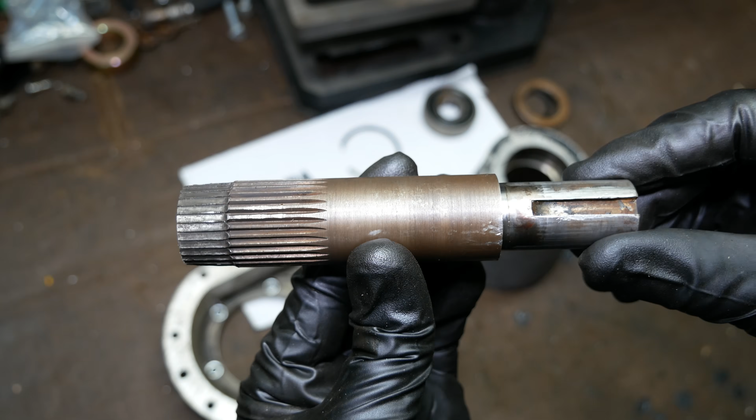There's a lot to say about the adventure that I ended up having trying to replace this input shaft, and we'll try to condense it into this video as much as possible. First, we'll take another look at what's wrong with it. You don't need a particularly keen eye to do so though, as the last half-inch of splines have been clearly sheared off. The exact cause of this is unknown to me, and this appears to be the weak link in a chain, whether it was designed that way or not.

The input shaft engages on this coupler, which is bolted to the drive gear in the front end of the supercharger. It's pretty clear that these splines don't have a ton of surface area to work with based on how shallow the engagement of the input shaft was. The damage to the coupler isn't as obvious, but is definitely still enough that it should be replaced.

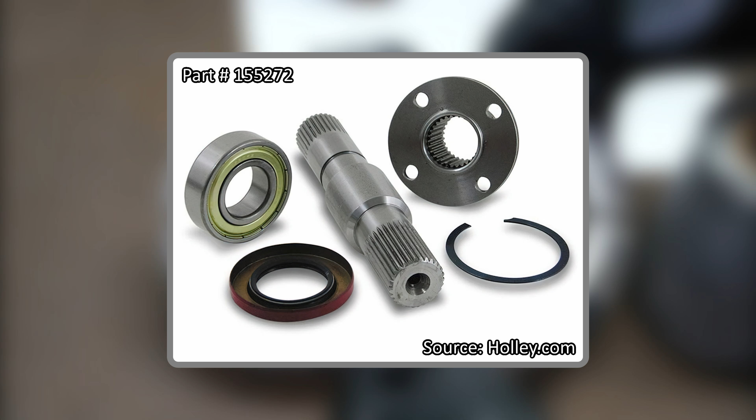The problem here is that not only has B&M as a standalone company not existed since 1999, it would seem that when Holley bought them, they didn't continue the 250 line of superchargers for all that long. And while there is an input shaft set available on Holley's website, it's a different model that uses splines on both ends. I scoured the internet and made a few phone calls, but it seems like there's just no way to get one of these shafts anymore.

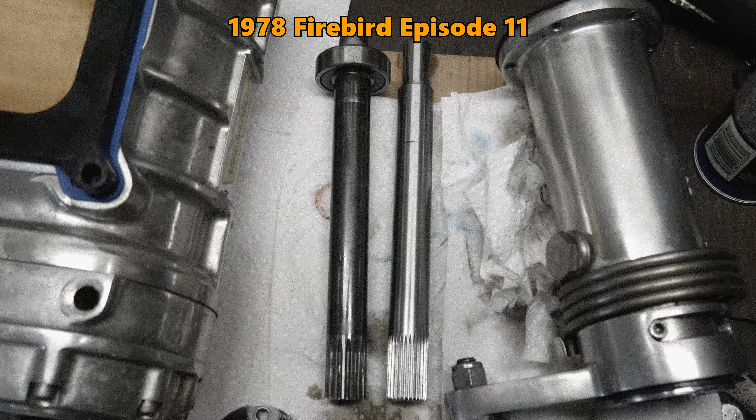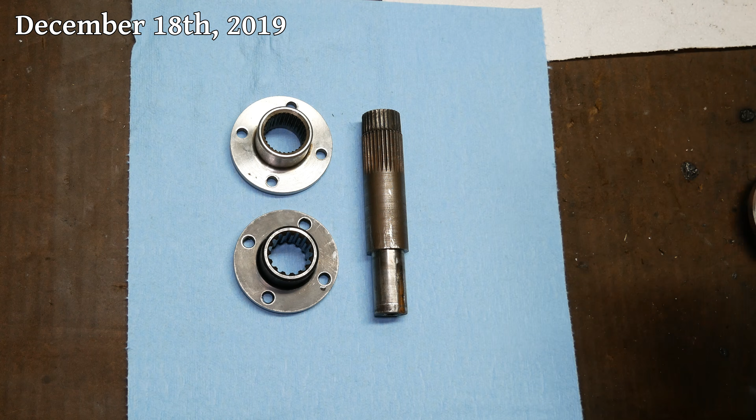But from our past experiences with the Weiand 144 supercharger, which is very much based on the old B&M designs, we know that its front drive parts bear a striking resemblance to those in the B&M 250. The problem is that the input shaft is just a little bit longer. This particular example is also a coarse spline layout with only 15 instead of 30 like on the fine spline models. We removed these from the 144 because the looseness in the splines was creating a bit of excess noise.

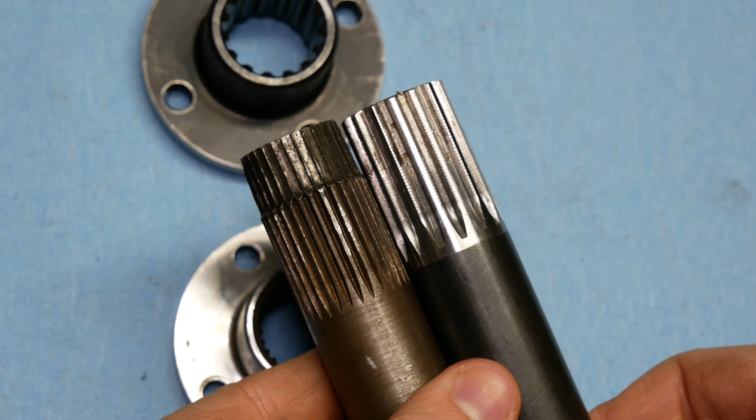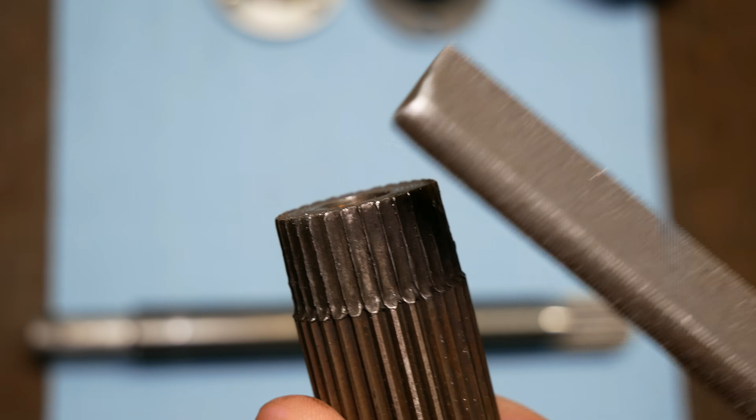It ended up being very convenient that we had these sitting around because we were able to use them to confirm that the old B&M parts are compatible with the newer Weiand parts. And other than the spline count and, of course, the obvious difference in length, they seemed like a perfect match. Taking a file to the old input shaft, it sure seems like it's made out of mild steel, and at the very least, none of it is hardened anymore.

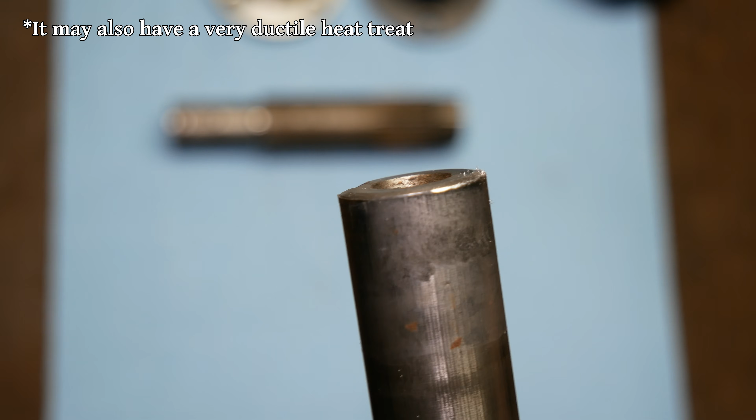The 144 input shaft is definitely harder, but the file still marks it, and I think it's probably just a different grade of steel. At this point, it's clear that we're going to need a custom input shaft to replace the old one, but I don't really want to use the coarse spline shaft because it might just have the same rattling issue it did in the 144.

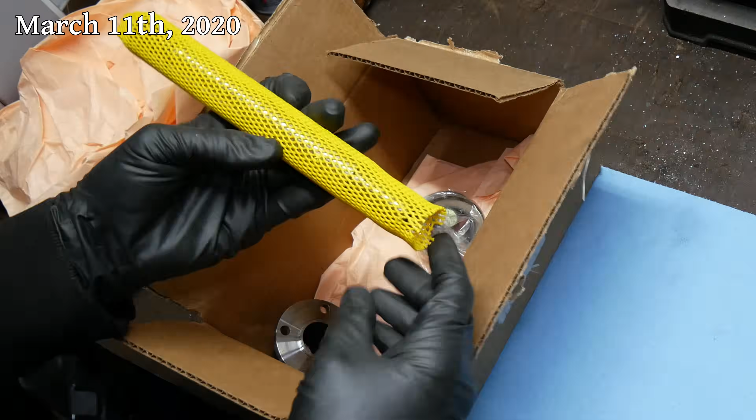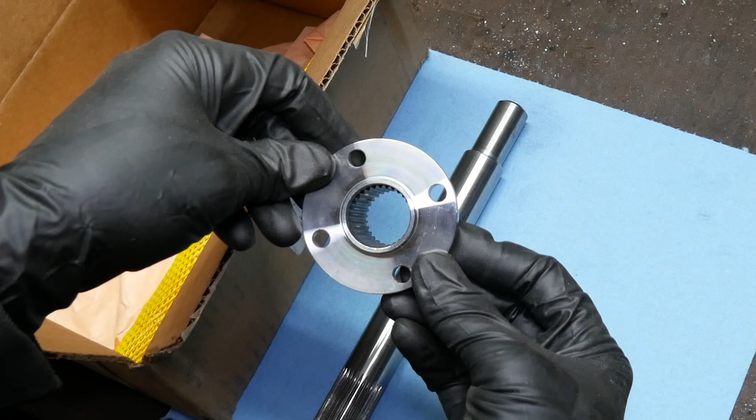So, for a better starting point, I went out and bought this set. It's only one part number off the 91180 set we used in the 144 supercharger, the only difference being that this one is a little bit shorter and I was able to find it at a better price. The set includes the input shaft itself, a new improved coupler, and a new front bearing and seal.

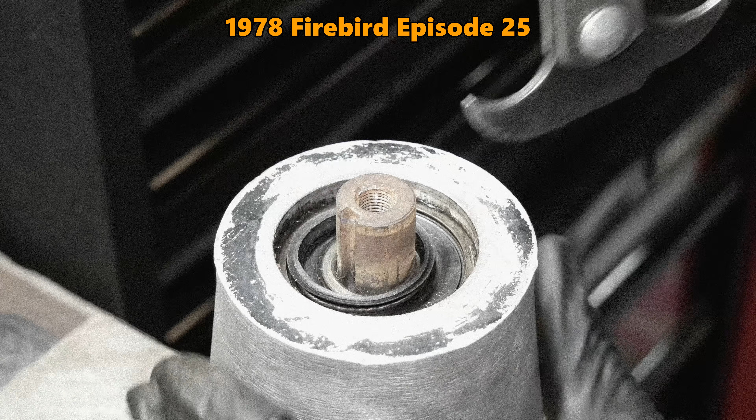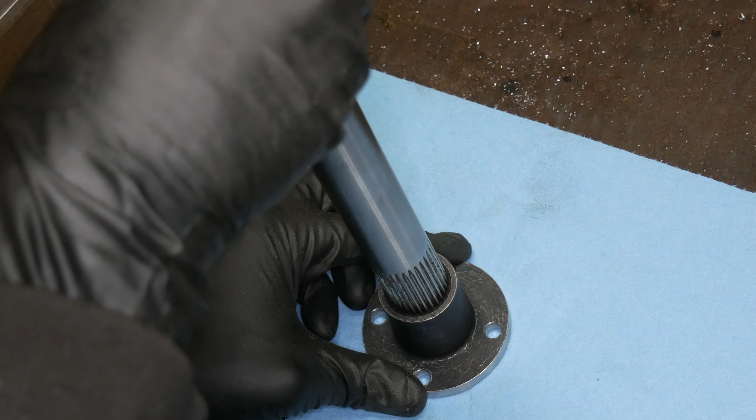Back when we installed the 91180 set, we found that the seal included in it was incorrect for our application. Bizarrely enough, this set included that same seal, which is correct for our 250 since it seals on the pulley coupler. Anyway, that seal is not the important part of the set. Like the old B&M ones, these are fine splined parts, although they certainly look a lot nicer. They're also a very tight fit to each other, and it took a mallet to separate them.

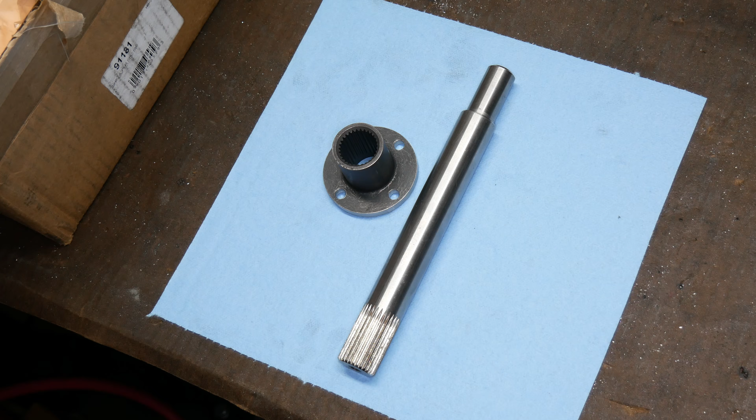This new input shaft seems like it's the same hardness as that coarse splined one, so it's probably a decent grade of steel, but not actually heat treated. With them laid out next to the old 144 parts, we can see that the shiny input shaft is about an inch shorter, while the coupler that came with it is half an inch longer. This taller coupler, which I assume is some revision on the design, pretty much doubles the spline engagement and should make for a much stronger connection.

The spline count of 30 is also a perfect match for those old B&M parts, which raises some questions as to why there was ever a 15 spline model. Okay, whatever, I've already talked way too much about this stuff. What about actually making an input shaft to fit this thing?

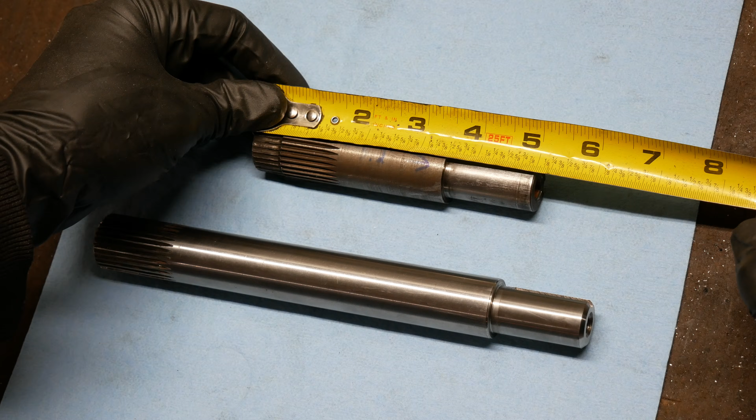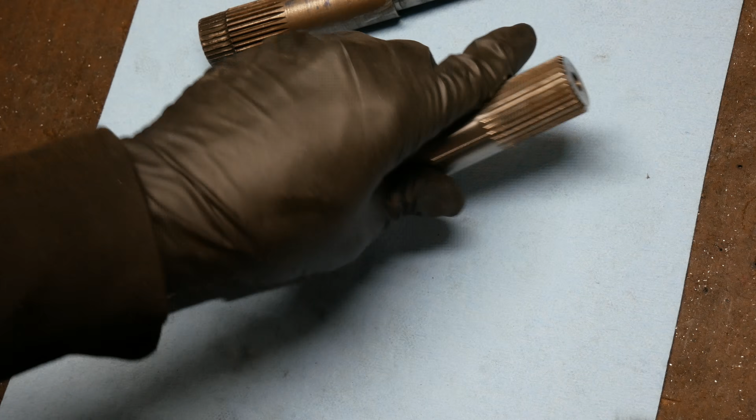A smart, sane, normal person would take the input shaft we just bought and send it to a machine shop to have it shortened and a new bearing shoulder and keyway cut. Since cutting splines is a more specialized operation, that would be the cheapest and easiest way to go. Of course, that's not what I did. I thought, I can shorten this thing myself.

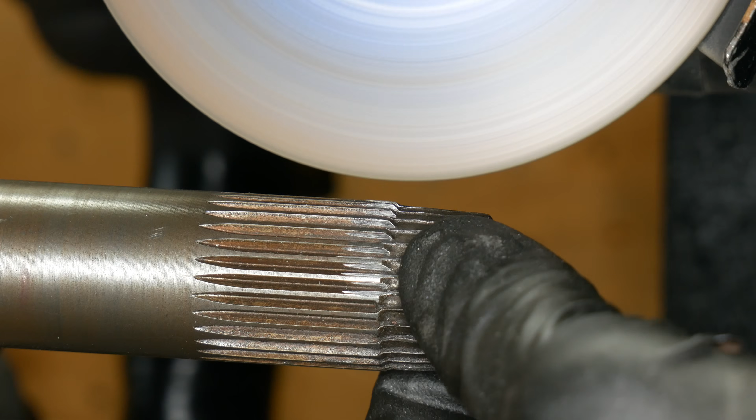For various reasons, I'm going to recommend against doing just about everything you'll see in the rest of this episode. If you want to skip this, I wouldn't blame you, but I felt like this trial and error process of trying to find a way to do this myself was worth including in the series.

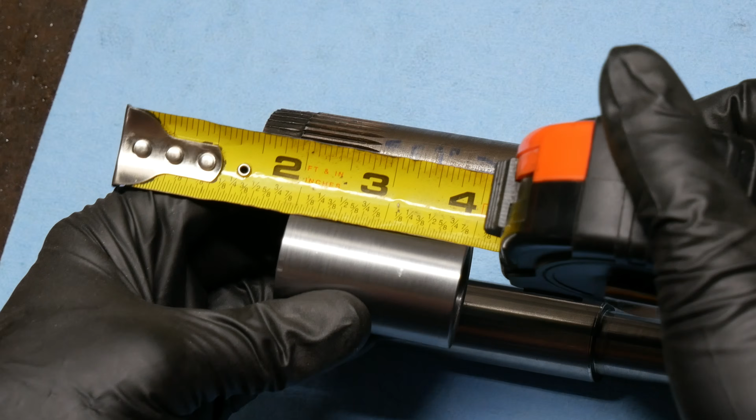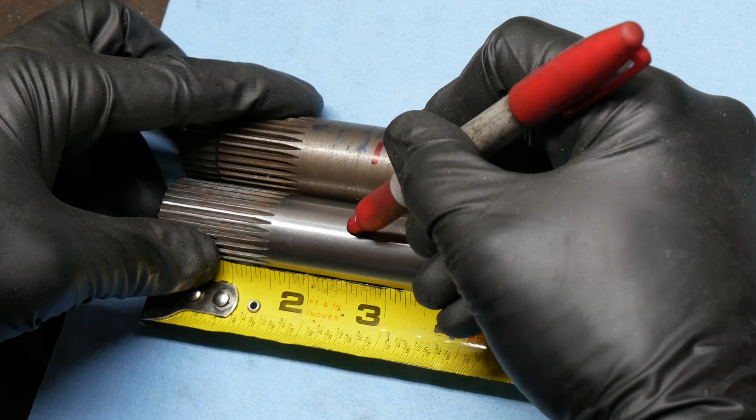The first thing we tried was shortening that brand new 144 shaft. This will require 2 cuts, a whole lot of welding, and this tight-fitting mild steel sleeve that will go over top of the whole thing. Because it's a slip fit in the coupler, the overall length doesn't have to be incredibly precise, but we do want to get it as close as possible.

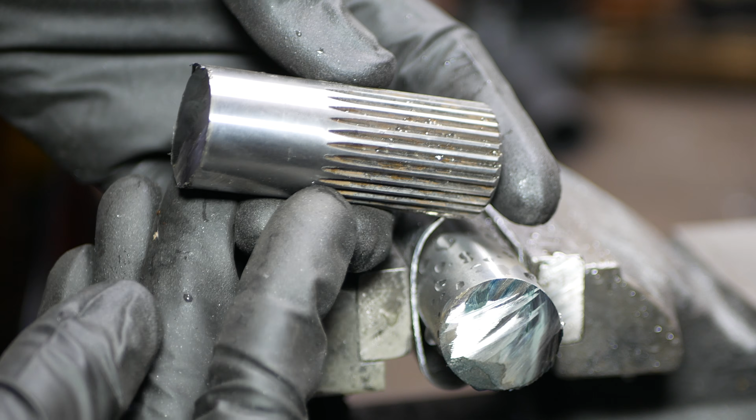The cuts were made with the angle grinder by not applying a lot of pressure, but just taking a little bit each time. Not knowing for sure what the material is, I tried to be careful about putting too much heat into any one part of it. Before long, we were all the way through and now have a nice, expensive little splined stub.

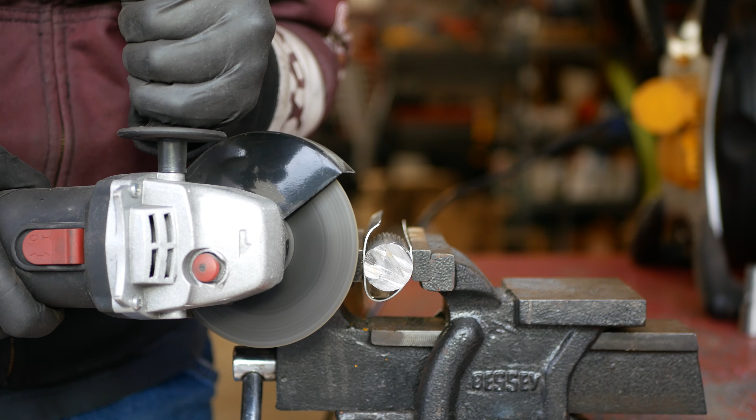We'll repeat that same process to make the second cut, and pretty soon we've got our 2 pieces. The length seems about right. Other than the cut down the middle, these 2 parts are pretty much the same. To make for a nice strong connection, we'll need to cut a chamfer into each end of the shaft so that we can fill in the valley with weld.

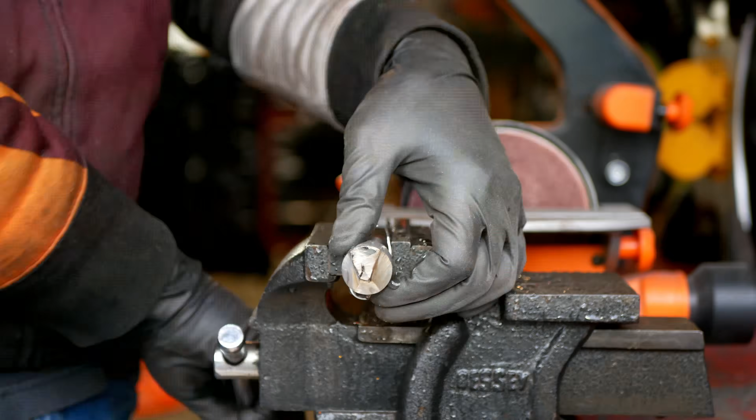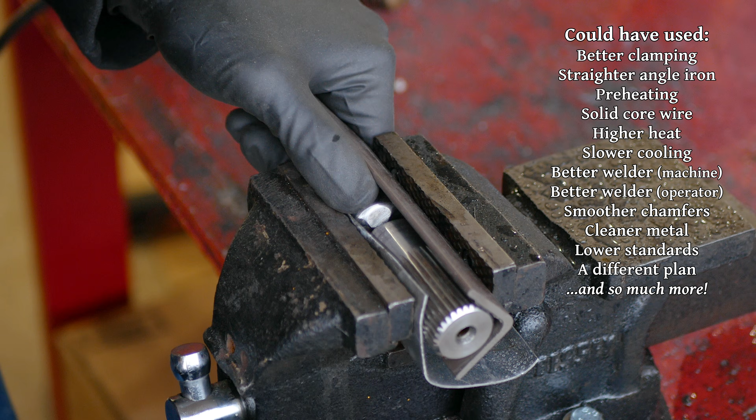Other than spending 600 years sanding it, I didn't have a lot of ideas about how to do this, so we'll just nibble away at it with the angle grinder until we have the rough shape we're looking for. Then, in an attempt to keep everything aligned, we'll clamp it down in the vise up against a piece of angle iron. I truly cannot express how non-ideal all of this is. I was just really hoping it would work out because it would be cool to be able to say it was done this way.

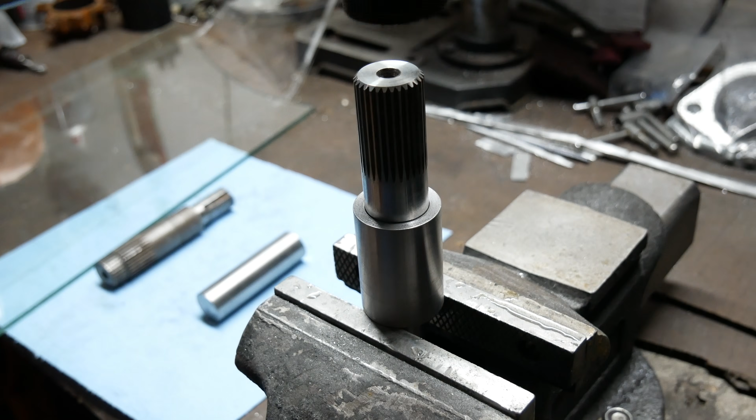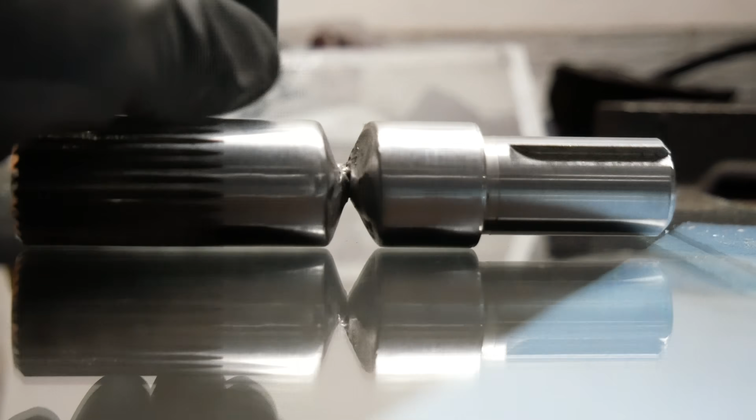We'll start off with a few tack welds and try to make sure everything stays relatively cool. Here it is after those initial welds, but we can already tell it's not straight enough because it won't slide smoothly into the sleeve. We can further test this and visualize it by rolling the shaft around on a piece of plate glass that should be very flat. From this, there is some obvious wobble, and if we can see and hear it, it is way too much. I tried straightening it, but it just wasn't happening, so we'll have to try again.

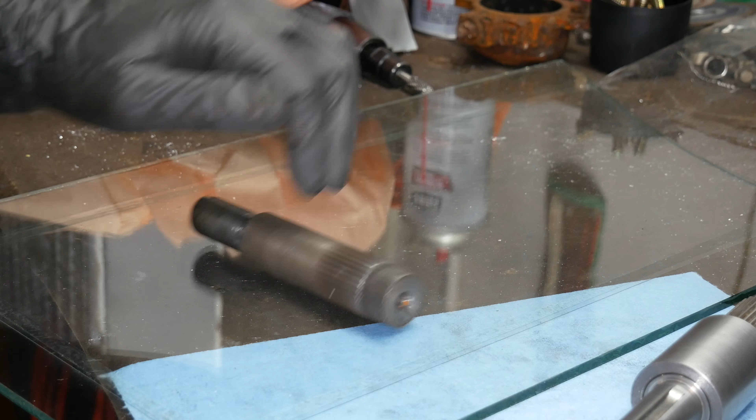This time I wanted to see if there was any noticeable wobble with the steel sleeve holding it together. And as far as I could tell, there wasn't. It was at least as straight as the old B&M shaft. So I decided it made sense that we would cut a window into the sleeve so that it could hold the shaft in line while we started to weld it.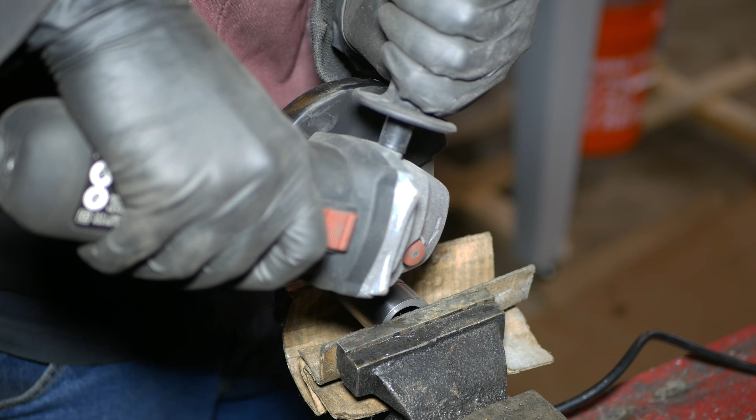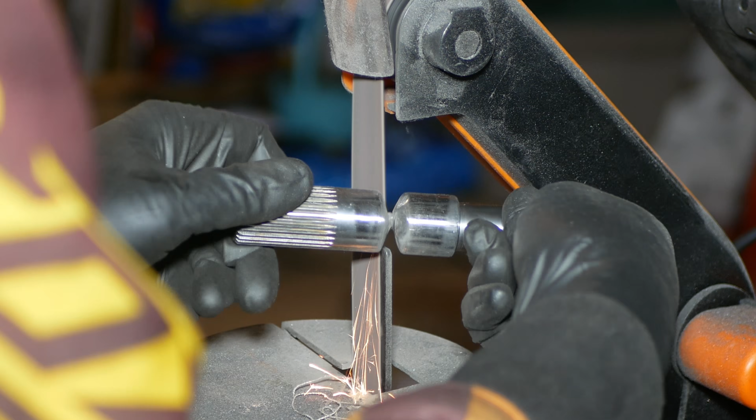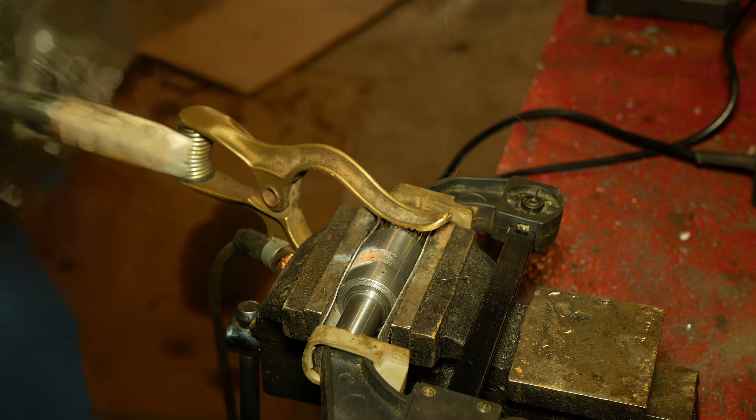We'll drill out the 2 ends of that slot and then connect the lines with the angle grinder. It is a bit harder to tell for sure, but it seems like everything is pretty concentric. So back to welding, this time through the window in the sleeve. We'll do a little bit of cleanup and then head back to the glass, where it seems like the input shaft is pretty straight. This was followed by a bit more welding, again through the window, and it seemed like things were still going well.

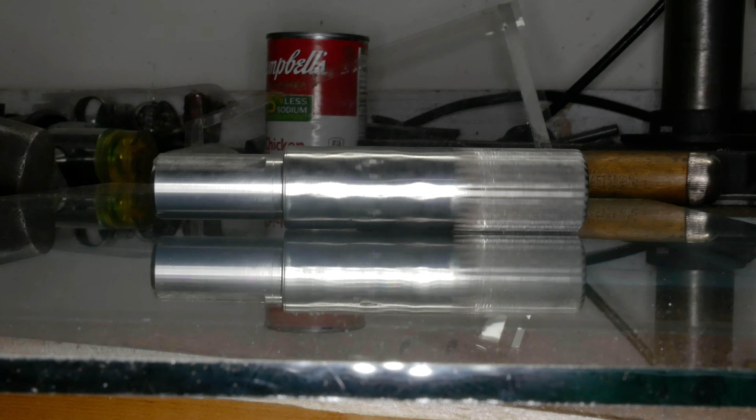We continued to build up the weld, rotating the shaft a bit at a time until it was solid all the way around. Any of the weld extending beyond the 1-inch diameter of the shaft will have to be ground off since we still need that sleeve to fit over it. Once that was taken care of, this is what we were left with. And amazingly, as far as I could tell from the sound of it rolling and watching it, it sure seemed like it was still straight.

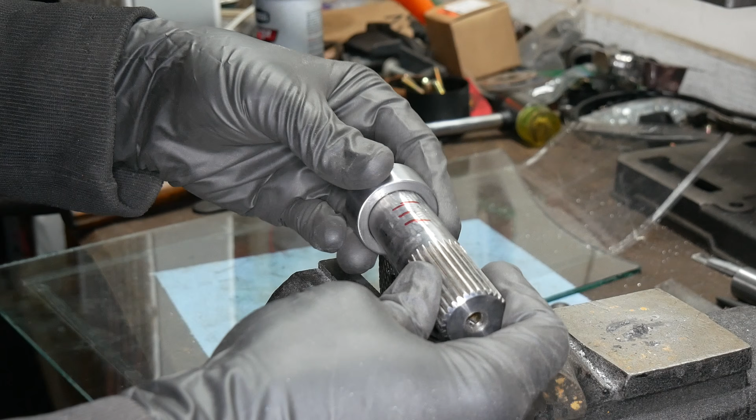But of course, that's only part of the battle. Without additional reinforcement, I am just not confident in those welds holding. So it's time for the sleeve. We'll cut a section out of it about 5/8 of an inch long that should nicely bridge the welded portion of the shaft. We'll start attaching the two with a few heavy tack welds.

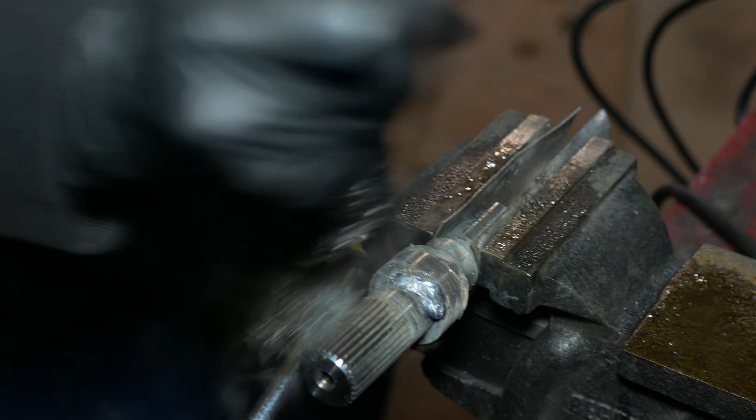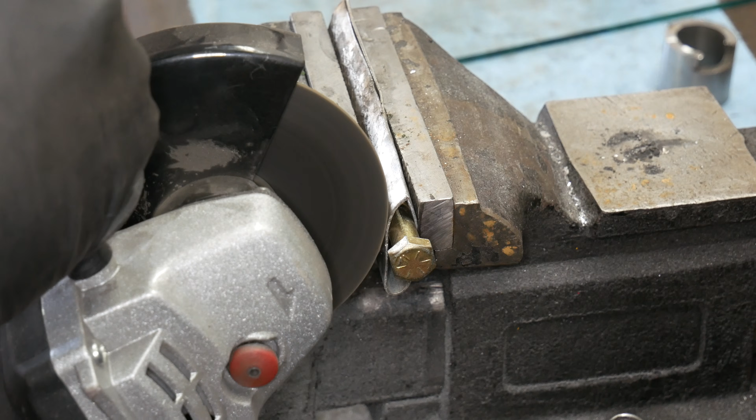And I think that hanging that off of the vise only supported on one side is where I really went wrong. I figured that these short welds wouldn't be enough heat to distort 1 inch of solid steel, but I guess I was wrong. This spent a while up against the belt sander to make it smooth all the way around, but now we can't really roll it back and forth on the glass to get an idea of how even it is. In an attempt to find a different way to test for this, we cut the head off of a bolt and threaded it into the old input shaft, which will get chucked into the drill press.

Except, well, that doesn't go quite as planned. I honestly don't know if that's wobble in the drill, the bolt, or the threads cut into the input shaft, but either way I don't think it's telling us all that much. To do things a bit differently, we'll thread a bolt that hasn't been beheaded into each input shaft and spin that with the drill press via a socket adapter. There's a bit of wobble between the socket and its drive, but that may actually be helping here, and the old B&M input shaft seems to spin pretty nicely.

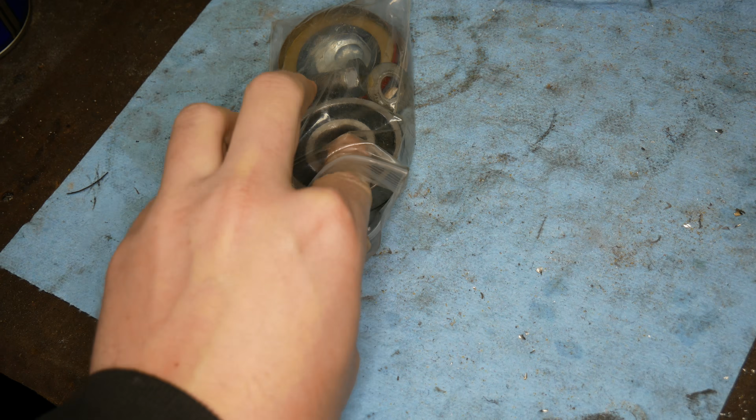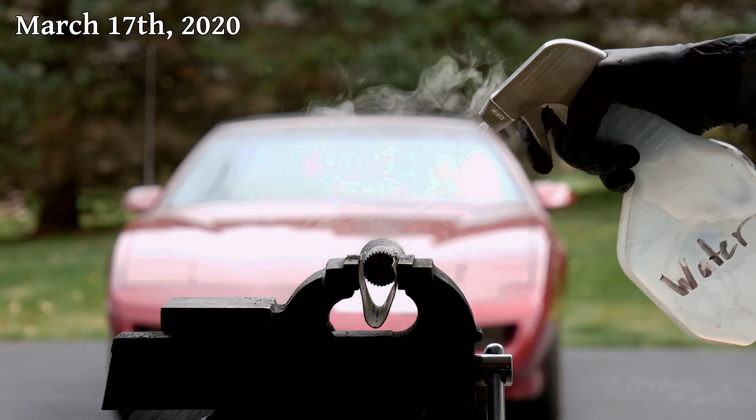So what about my welded monstrosity? Well, it doesn't seem great. Between the less than perfectly balanced weight in the middle and the questionable amount of out of round, there is definitely a lot more vibration. We even went through a different test where we installed both input shafts onto a bearing and spun them in the vise, but really it's all the same thing. Eventually I decided to try again and cut the sleeve completely off of it. With that shaved down, it was now clear that the shaft itself was the problem.

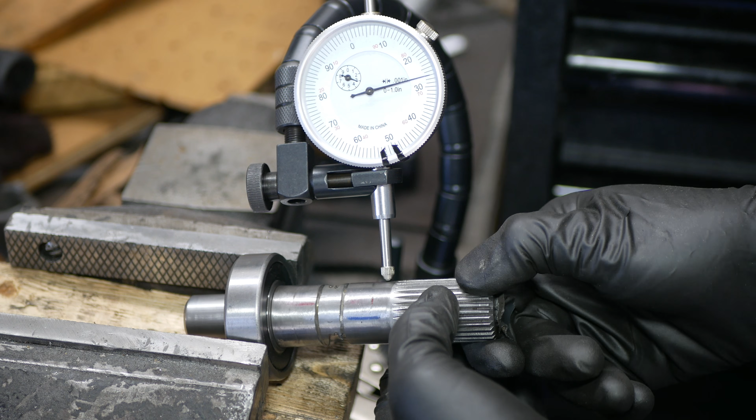I found what seemed to be the flattest side and cut a chunk out of the shaft opposite it. Then, my thinking went, I could tweak it just a little at a time until it was perfect. But after a whole bunch of back and forth, it was definitely much easier to make it worse than better. When I did eventually get it in a position with a minimal amount of runout, I tried to weld it and it completely threw it out of whack again. Which is when I decided to give up. Well, give up on the welded shaft, because I still had some other ideas.

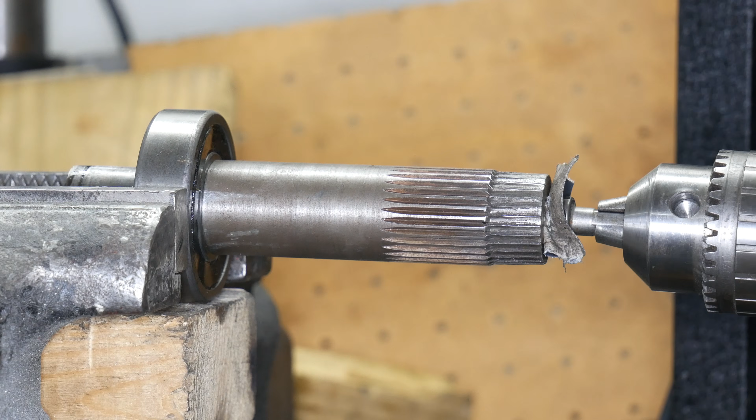The next of which was just to reuse the old shaft. But how exactly? This one already spins nice and true, it's just the splines we have to worry about. Although, only the last ½ inch of splines are damaged. We're not going to be able to do anything with those, but the new coupler we have is ½ inch longer than the old one, so if we were to use it, we would have the same amount of spline engagement as the drive setup did from the factory.

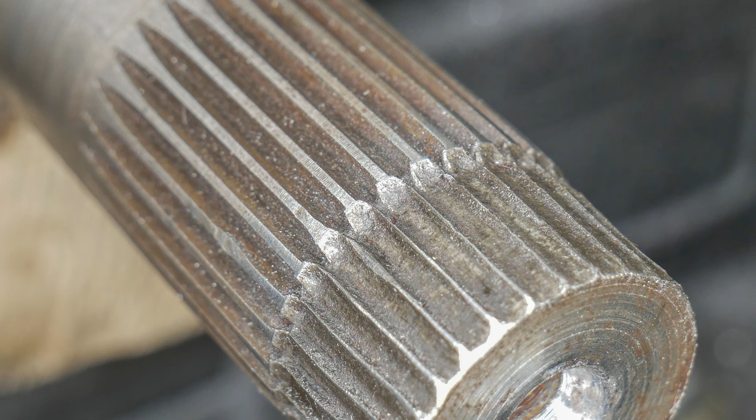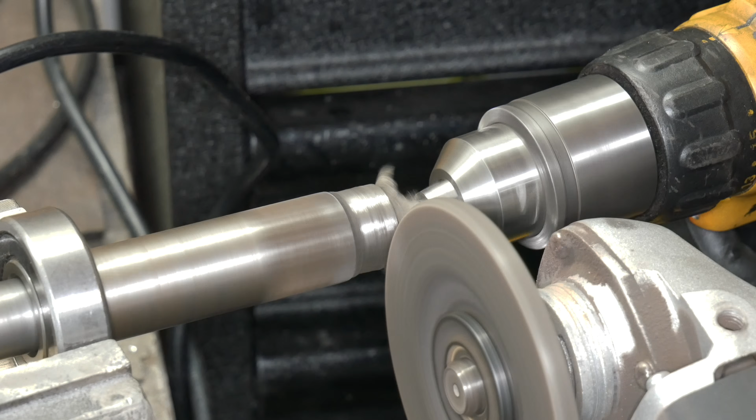Because the ends of the remaining splines are flattened out from the damage, we will need to do a little bit of modification to get that coupler to slide on, and it's not pretty, but finally we are able to install the coupler. From comparing the install depth of the old coupler versus the new one, we can determine that we have 0.57 inches of splines engaged. It's actually a little bit more than factory. This would probably have worked, and worked quite well.

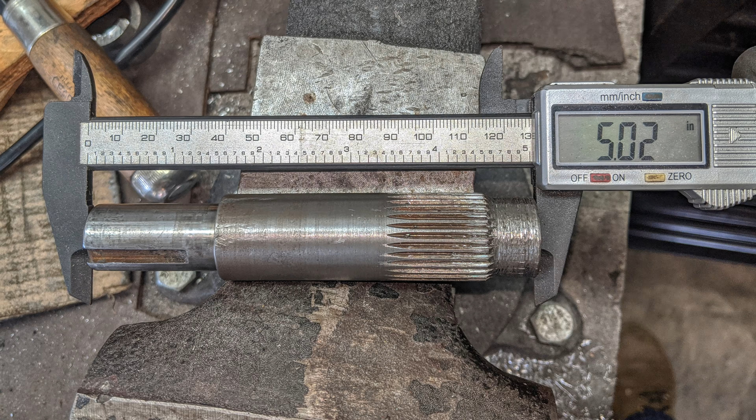The only concern I had left was that it might still not be enough to keep the splines from getting sheared off sometime in the future. After thinking about it for a while, I got a crazy idea in my head, and for some reason, actually went and did it. The first step is to drill out the center of the shaft to beyond the damaged splines. Then we'll proceed to cut off the entirety of that damaged area.

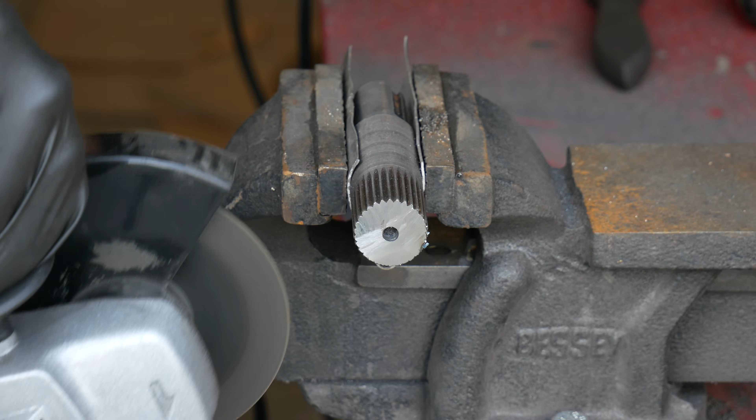We'll drill down to 0.75 inches and use a tap to cut in threads. And after some time at the disc sander, we have a nice squared off end. Other than being shorter than it originally was, it actually looks pretty good. But why do all that?

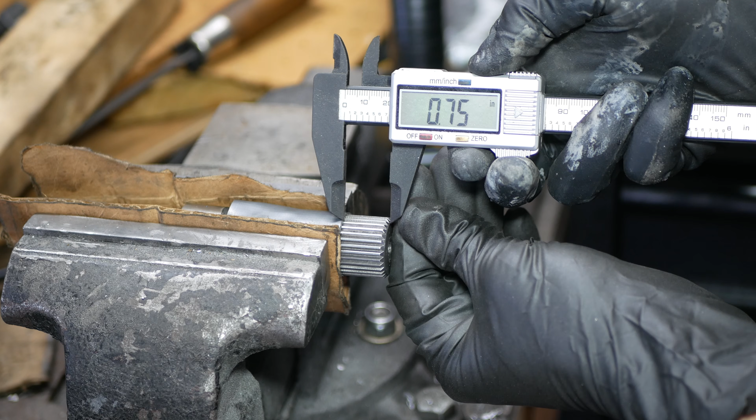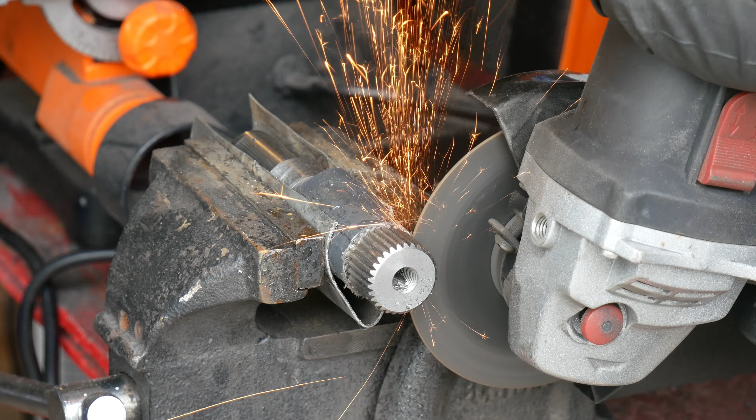Well, the idea is that we're going to take the end off of this other shaft and bolt it to the shorter one. We could weld that extension on, but after the previous warpage issues, I was a bit concerned about revisiting them. Regardless of the method of attachment, this two-piece shaft was never going to be anywhere close to as strong as a solid one, but I figured if we could add 5 or 10% more strength, it might be enough to keep the splines intact long term.

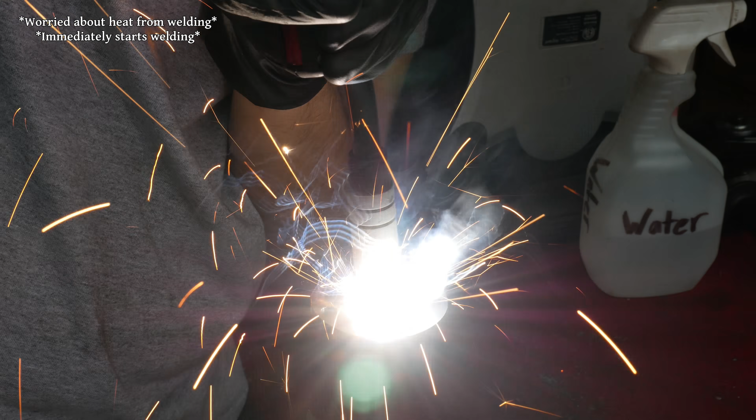The bolt we beheaded earlier will get cut to length and threaded into the shortened input shaft. We'll slide the spline extension over that, and the coupler will keep everything lined up. We'll get the extension about halfway filled up with weld on one pass to make sure the bolt got hot enough to melt together with everything else. We'll get everything cooled down and remove the coupler before doing one more pass of welding.

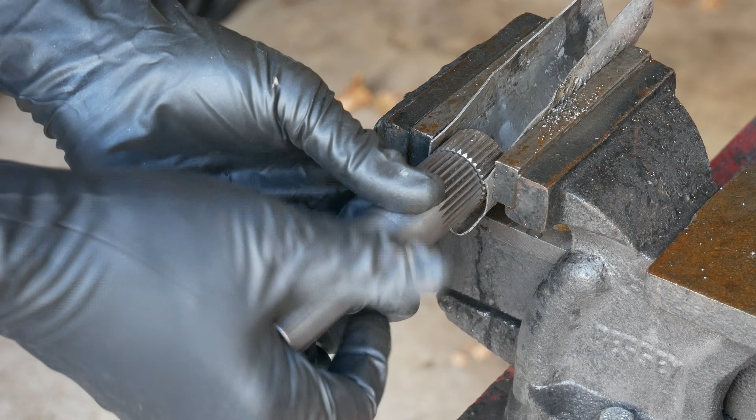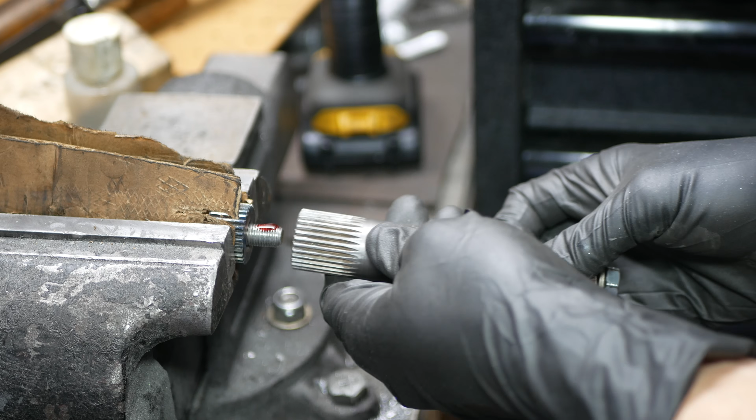The thinking is that if the splines ever did start to slip, it would be tightening the bolt in that extension and hopefully add just a little bit more for the coupler to push against. To make sure they really hold together, we'll apply some red Loctite and tighten down the input shaft onto the extension. This is where I got myself into trouble.

Yeah, by tightening this an extra 1/30th of a turn, it no longer fit into the coupler. I was able to tap the coupler onto it, but it was definitely not the same fit it was before. And from there, it never got better. I think hammering it into the coupler kind of just recut the splines on the actual input shaft just a little bit crooked so that they were in line with the extension.

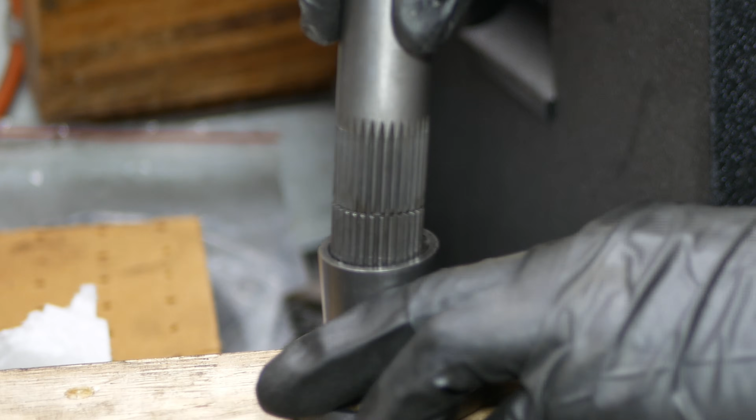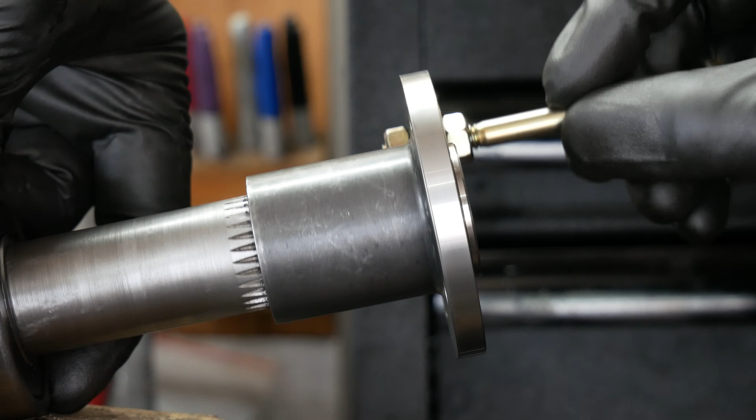And redoing some of the input shaft spin testing, you can see that the coupler has just a little bit of wobble to it. It's minor enough that it was hard to see with the naked eye, but it is definitely there. With the very high RPMs the supercharger needs to be able to spin at, the best case scenario here is that it would wear out the bearings faster. And that just kinda sucks.

It was a hell of an experience trying to make something that would work, and I feel like I did learn a lot. Sure, most of that learning was through mistakes, but those are the lessons that seem to stick around the most. We basically came out of this with a mock-up for the part that we need, but not one that I would actually feel good about using. So, once again, we need a different approach.

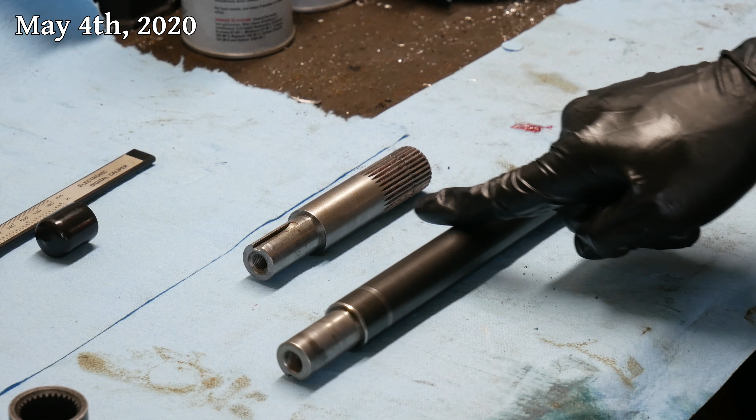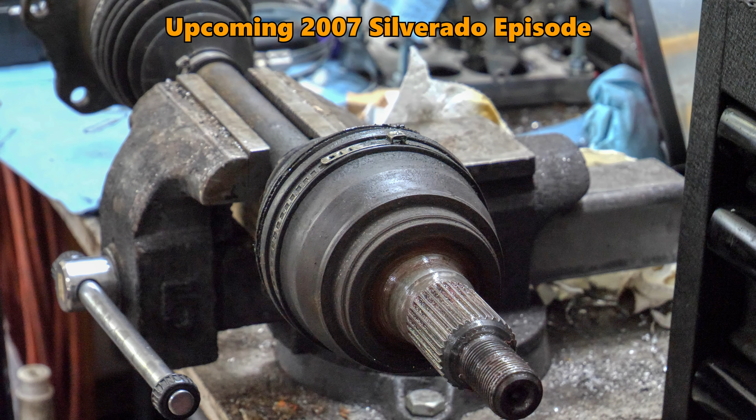I had been trying to find a way to modify this old 144 input shaft that we already had on hand, and after contacting a dozen machine shops, I finally had a plan. I had been reaching out to shops that make custom CV axles because that means they have spline cutting equipment, and the first one that got back to me quoted $600 and would only make a new part.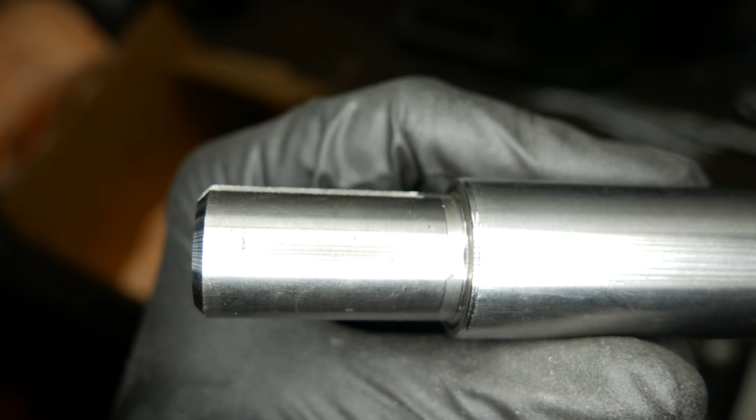For less than that, I could pick up another Weiand input shaft and have a more common machine shop modify the bearing end of it, which was looking like the only option until I found Brannick Motorsports out of Indiana. They gave a quote of about $250 in machine time to modify this part, and that seemed like it was worth a try.

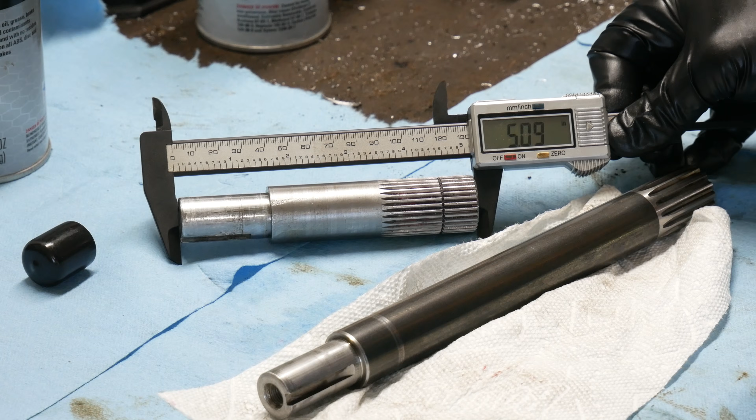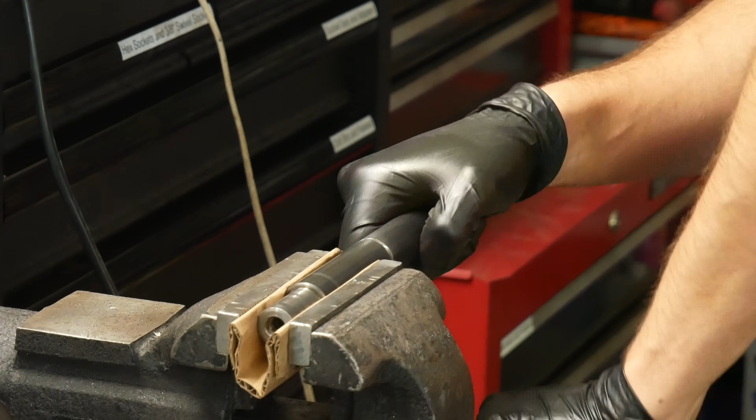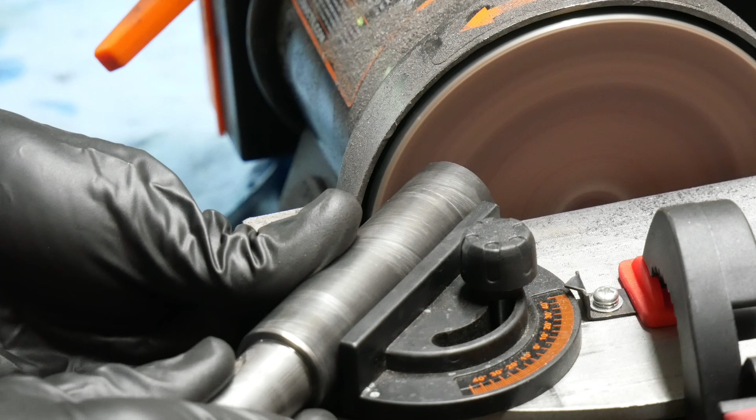Before we ship it out, and to save them a little bit of time, we'll go ahead and cut the shaft to length here. Like with the other cuts, we'll take a few breaks to let everything cool down and make sure we don't overheat the steel. Once we're left with two separate pieces, we'll use the disc sander to square off the cut on the piece that will eventually become our new input shaft. We'll follow that up with a minor chamfer on the outer edge, which leaves us with this blank. Well, half of a blank since it does already have one side finished.

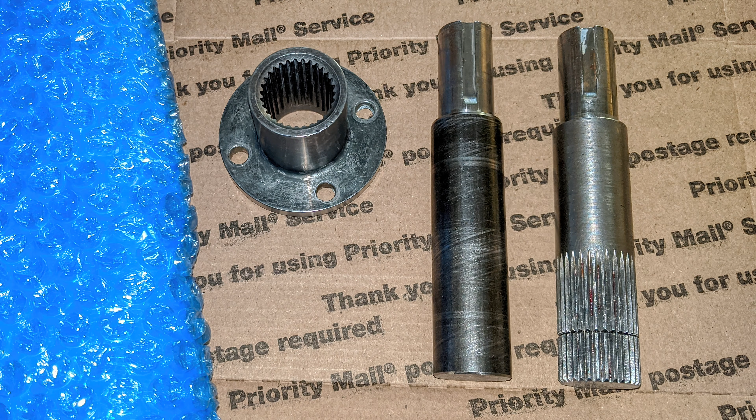We'll mail out the shaft blank, the bolt together shaft for reference, and the coupler so that they can make everything fit together nicely. The parts were sent out in May of 2020, which was, to say the least, a difficult time. So it wasn't exactly surprising that it took them 2 months to get the work done and mail the parts back, but the day has finally come. The total cost, including shipping, was much less than expected at only $90.

But how good do those splines look, and how well do they fit? They certainly appear to be nicely machined, though maybe could be a tighter fit in the coupler. For comparison, here's the coarse splined pair that we took out of the 144, and the factory thought was good enough to send out the door. Our custom cut shaft has a fair bit less play than that one, so I don't imagine it'll be enough to cause problems, and overall, especially for the price, I'm pretty happy with the results.

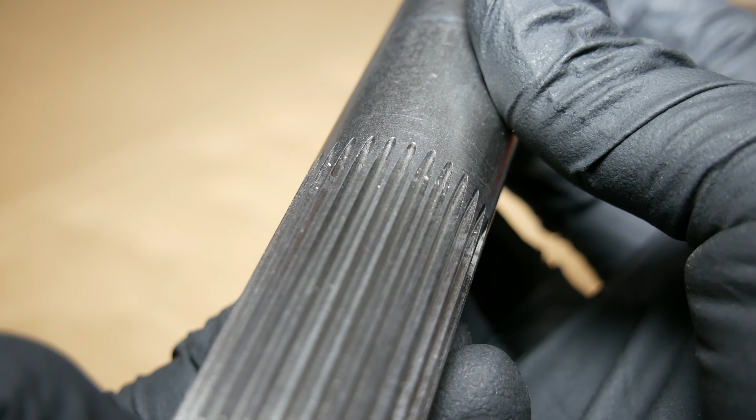Whether you'd call it frugality, pride, or stubbornness, I really like doing as much of this work as possible myself. But after all those failed attempts at making one, it was clear that this part was out of my league, so I'm very thankful to Brannick Motorsports for making this happen. We finally have an input shaft that's the right length and hasn't been welded or bolted together. But, perhaps unsurprisingly, I'm not done messing with it.

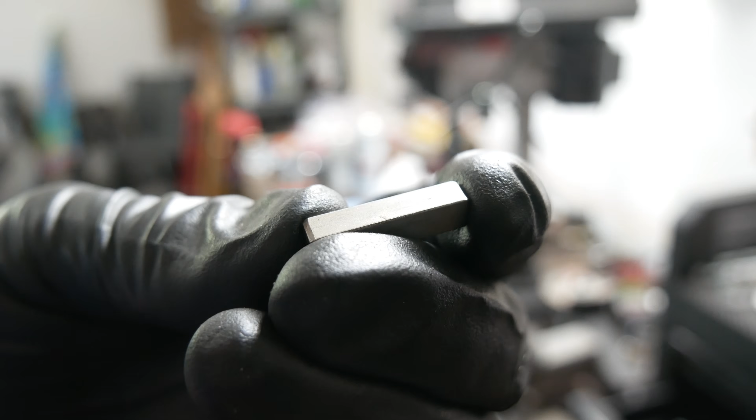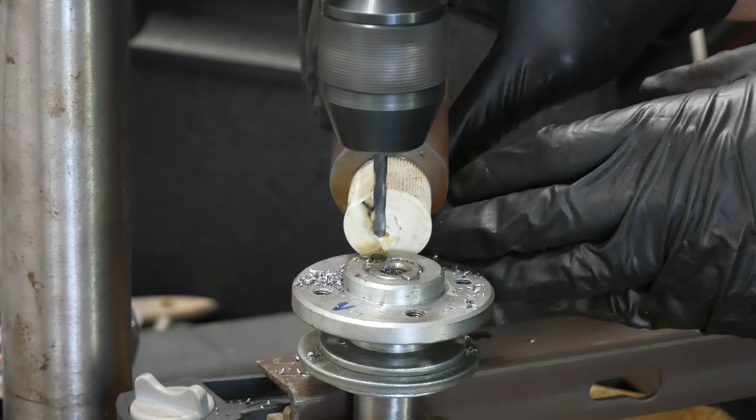We'll be drilling to just over an inch in depth, and these 3 washers on the drill bit will keep it from going too far. Considering the equipment and operator, this was never going to be incredibly high precision, but as long as the pin is a nice tight fit, it shouldn't really matter. We're using a 7/32 of an inch drill bit, and we will make a pin to match.

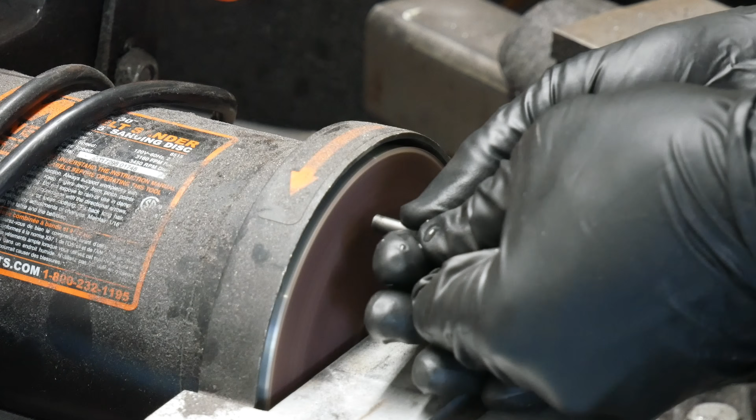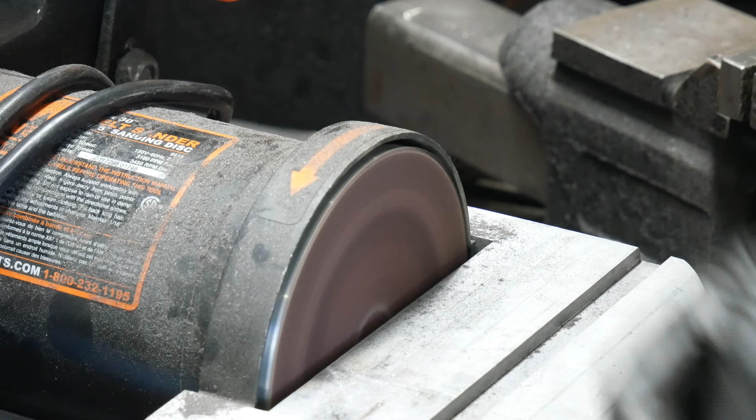I keep a lot of dull and broken drill bits around because they are perfect for little things like this. We'll cut an inch-long section out of this 7/32 of an inch high-speed steel drill bit, which will make a perfect dowel pin. With that cut off, we'll use the disc sander to knock it down to exactly 1 inch in length. We won't be going through the assembly process in this video, but we can jump forward a little bit to show you how the key and dowel pin will look once installed between the input shaft and the coupler. That should make for a stronger connection between the parts, regardless of whether or not it was actually necessary.

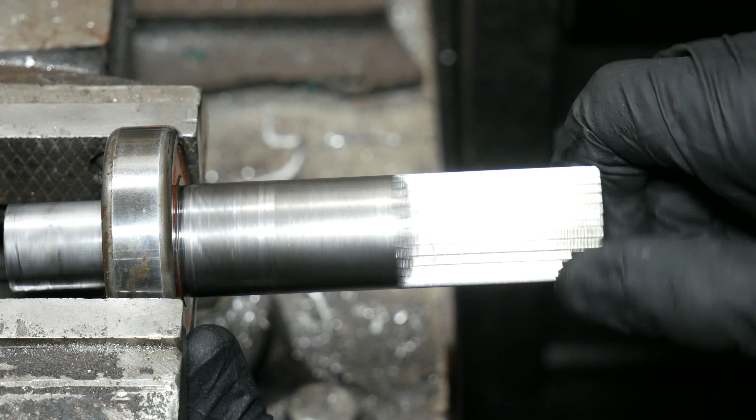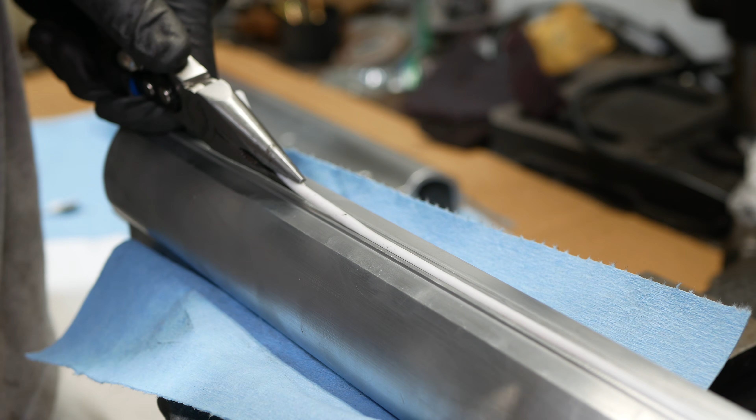I can't say the process of sorting out this input shaft situation was easy or fun, and neither was putting this video together. But sometimes plans don't work out, and I thought this was an important part of this whole rebuild procedure we're going through, so I didn't want to skip over it. Make no mistake, we're not done fumbling through that process, and there are plenty of problems ahead of us. Oh shit. Though at least we have checked one more thing off of the list.